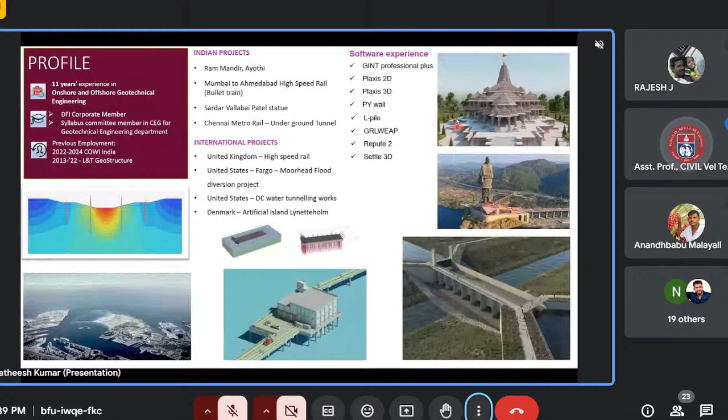Is it visible now? Still your profile page is visible. Okay, maybe some internet issue. Satheesh, you have to share your entire screen, not just the window. I am selecting the entire screen only. I think if you close this PPT, the other one will come. Is it visible now? Your profile only is still visible. Okay, let me reconnect. Sorry for the inconvenience.

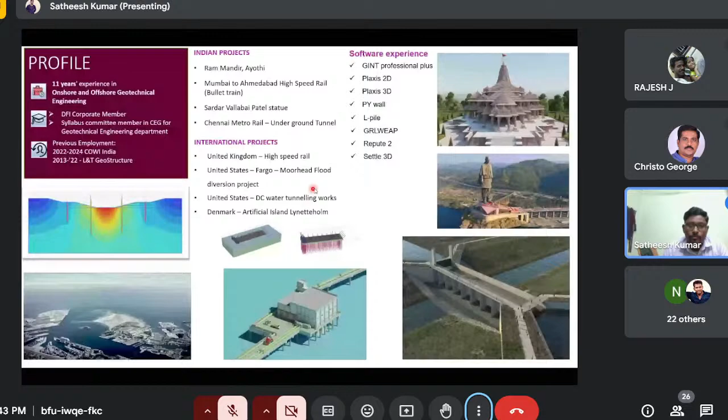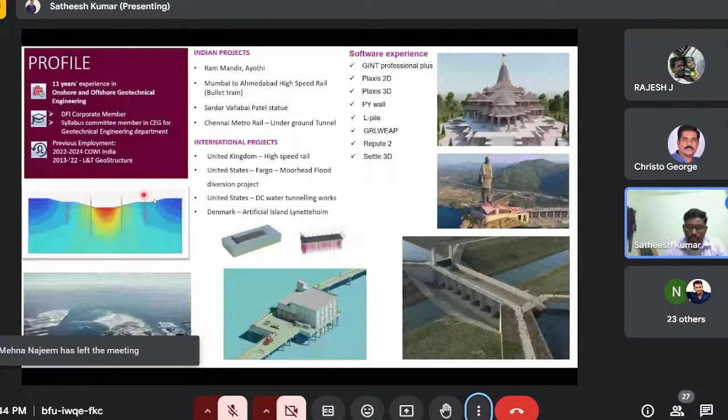Is this geotechnical and foundation engineering slide visible? Yes, your content slide is visible. Okay, thank you. This is the content I'm going to cover today: introduction to foundation, geotechnical investigation, field load test, deep foundation, and ground improvement. These are the major topics we need to refer to for these things.

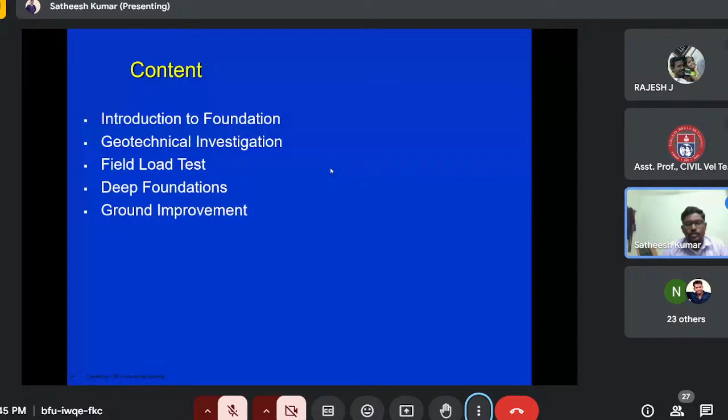Then I'll go through typical work in geotechnical investigation, which is mainly carried out towards the responsibility of ensuring sites are adequate, safe, and economic for design. When it comes to investigation, about 1 to 2% of the total cost is spent on geotechnical investigation, which actually governs the huge amount of work for the superstructure.

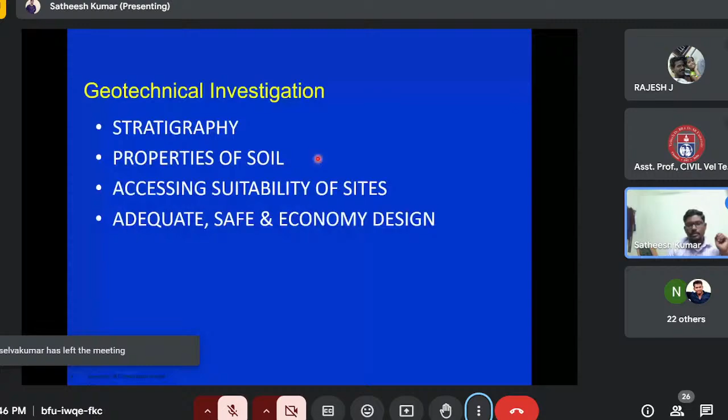Mainly, the soil data required for any geotechnical design relates to soil group classification. When it comes to strength and compressibility characteristics, which define bearing capacity or settlement, this includes angle of internal friction, unit weight, water content, permeability, maximum dry density, optimum moisture content, core recovery RQD, and UCS value. In addition, we need to measure the water table depth.

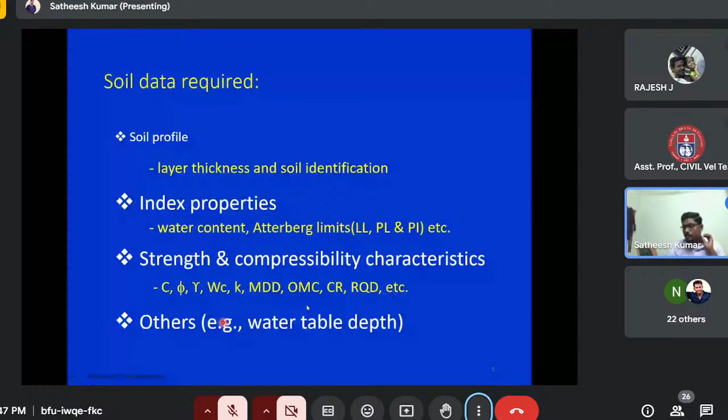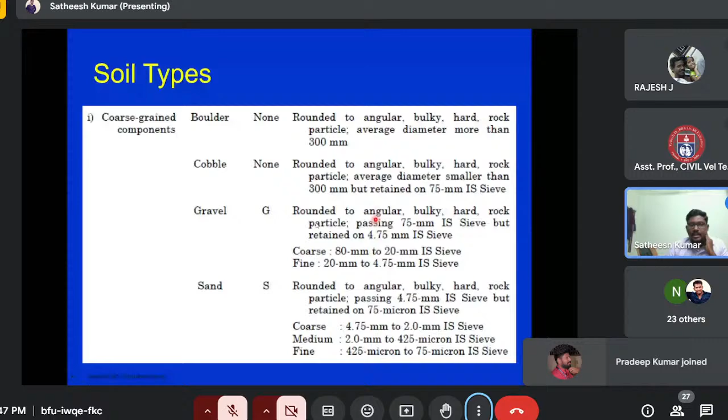This classification is given in IS 1498, based on grain size analysis. You can categorize coarse grain components more than 4.75mm as gravel, more than 75mm as cobble, and more than 300mm as boulder. The finer components are silt, clay, and organic matter - I would call these problematic soils. Silt and clay become the major issue for foundation design, especially under the water table.

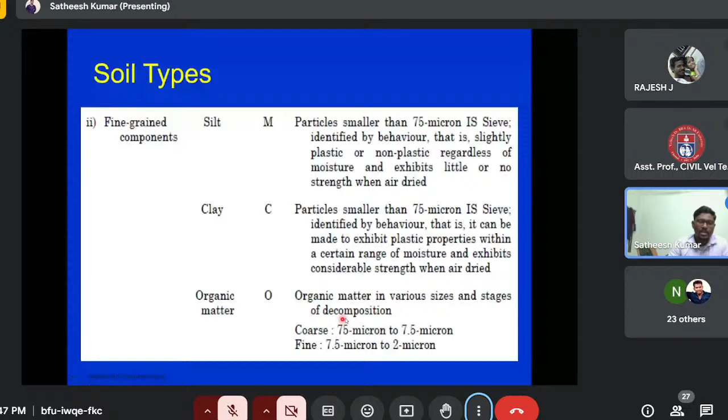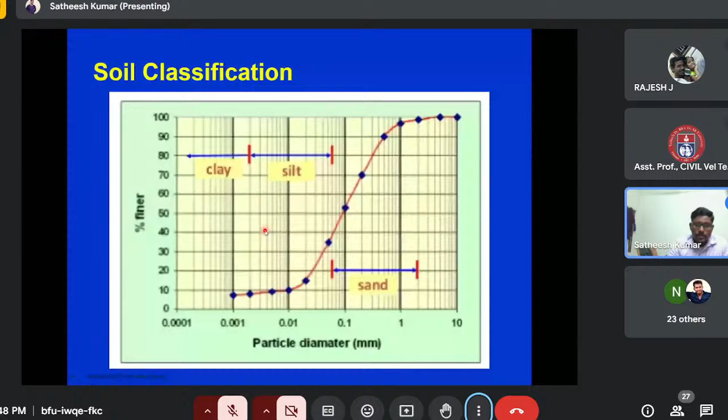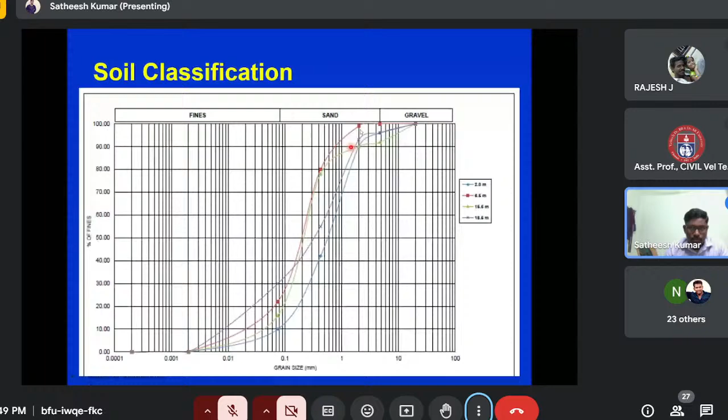Reliability on the parameters, we need to pay more attention to that. There are so many authors who have studied about this standard penetration test, and they are preferring to go with the standard penetration test. This other test, I would say in our Indian projects, hardly we'll be going with once in 10 of the test results, but in Indian projects actually it is mostly borehole investigation.

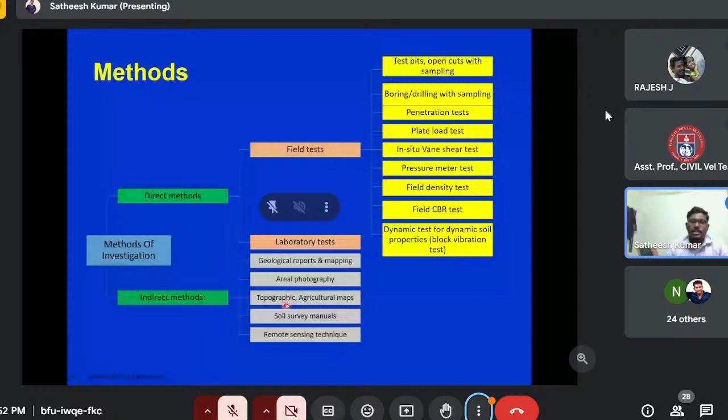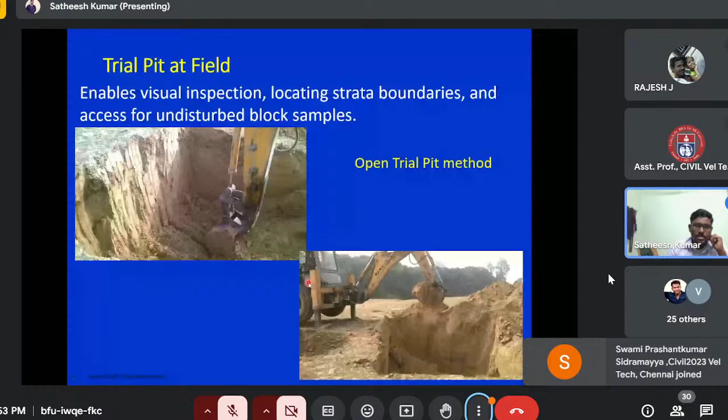Previous authors might have covered this explanation about this SPT test.

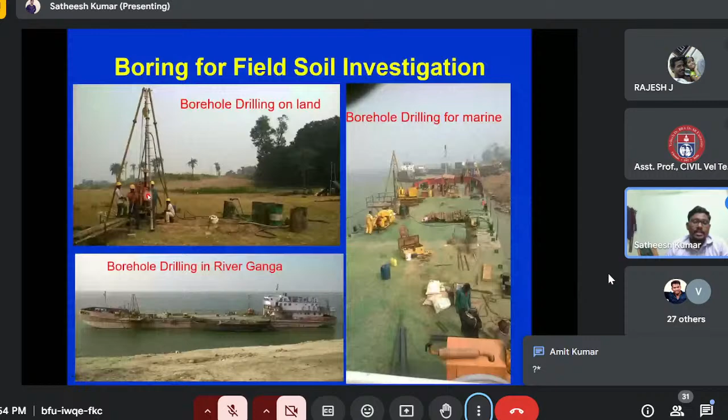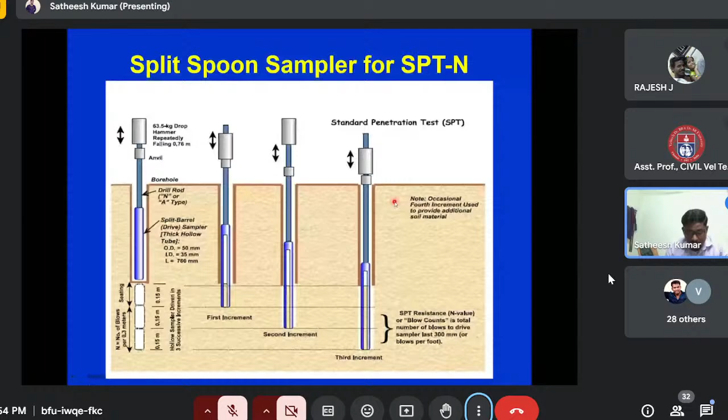One thing I would like to emphasize is the correction for that SPT test. There are other manuals and references where the tendency is we need to perform this rod length and hammer efficiency correction, and this sample diameter, bore diameter correction.

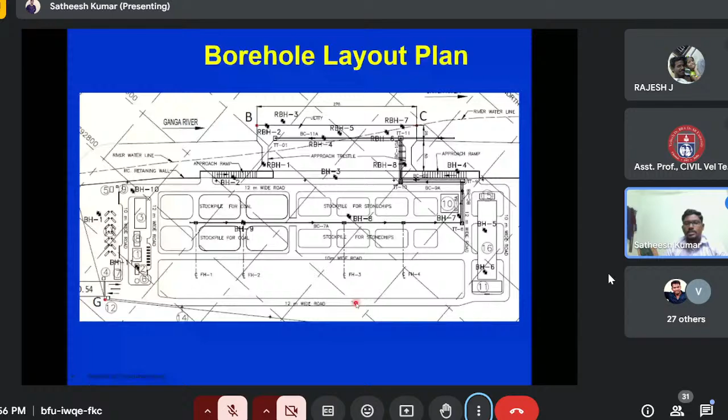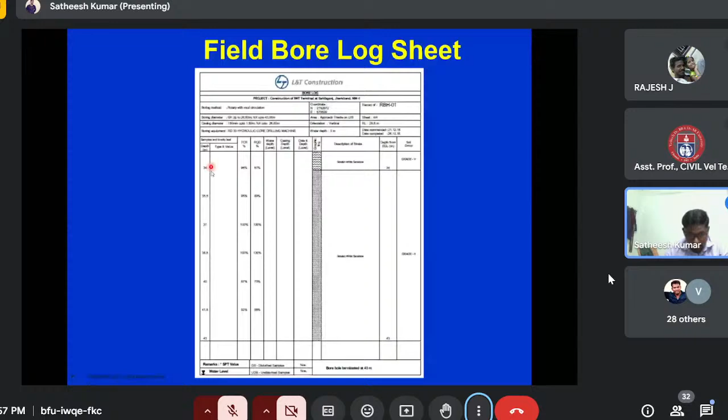So this is a typical bore log, and this is a typical subsoil profile which is generated using the soil investigation data arrived at in the field and the lab. This profile is made with the help of gINT software.

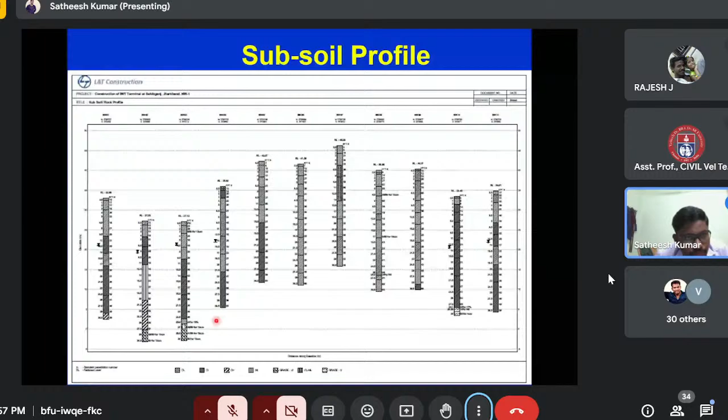It will be helpful to arrive at the rock starting level, because in this project we need to terminate our pile on the rock. So you see this hatch pattern grade 5 rock at the pile foundations. The pile foundation

are actually mainly recommended when the superstructure load is more, and then you need to take care of the bearing capacity which is offered by the soil.

And when it comes to riverfront structures, again, this pile foundation is mostly recommendable because construction of open foundation or raft foundation in the waterfront is difficult, so we go with the pile foundation.

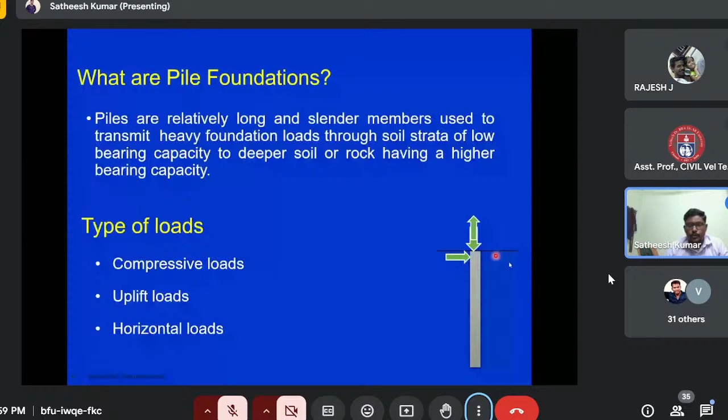So mainly for the piles, it is compressive loads, uplift loads, and horizontal loads acting on the building or superstructure. Then there's lateral load or the eccentricity of that lateral load, and uplift load - those are the major locations wherein you can find uplift loads.

And we have revised the type of pile. We have used both the cast-in-situ pile, driven cast-in-situ pile, and in some locations near this Manadi and all, we went with this precast driven pile for supporting structures - not for the main bridge structure, but for office buildings, for which we went ahead with that precast pile foundation system.

The main pile load transfer mechanisms are end bearing and friction piles. So when you are placing your foundation in sandy strata, the main resistance of the pile would be generated through friction. When the load is in compression, because of the interfacial friction between the pile and soil material, there is resistance - that is your friction resistance. This is how friction force is developed when compression load acts.

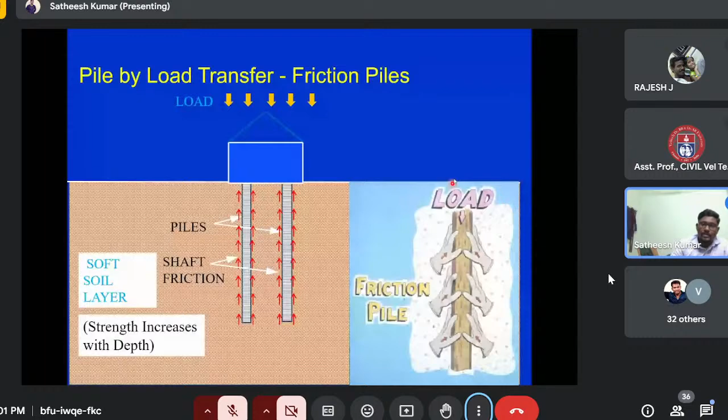When it comes to end bearing, let's say if I have a soft soil of SPT-N value less than 4 for a depth of say 12 or 13 meters, I cannot embed my pile into that soft soil, so I need to search for a stratum which is rigid. In such cases, the resistance would mainly be developed by the rock. Whatever load is applied will be directly transferred to this hard strata, since the soft soil is not going to offer any resistance because of its low stiffness.

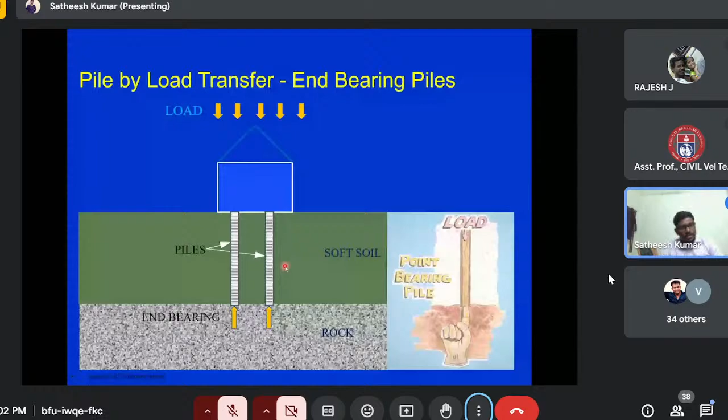To estimate this bearing capacity, I would mainly recommend IS 2911. For any Indian project, most cases follow IS 2911, wherein pile capacities are explained by the static formula method and dynamic formula method. It has two components: one is your frictional resistance and the other is bearing resistance.

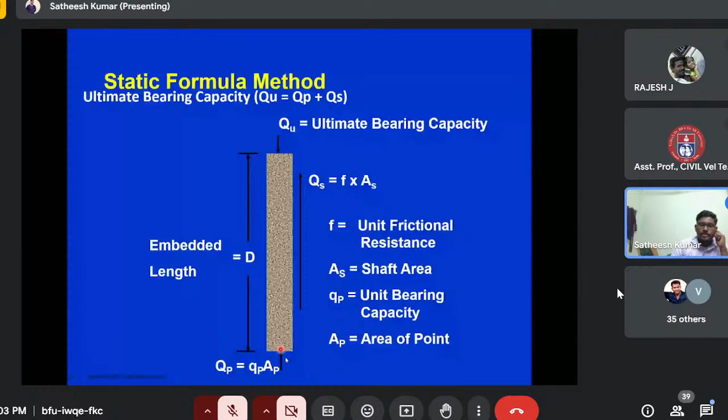Frictional resistance is based on the peripheral surface area of the pile. When it comes to bearing resistance, it is based on the cross-sectional area of the pile - that portion which is contacting the bearing strata. That area is taken and the unit bearing resistance multiplied by cross-sectional area gives bearing resistance. For uplift, we take only the friction resistance developing in the pile because the pile is being lifted in the upward direction.

If there is a loss of contact with the bearing strata, we need to consider only the resistance developed on the side of the pile. That is your safe skin friction capacity, applying the reduction factor or safe capacity factor given in IS 2911.

Usually, with history or test results available, you can go ahead with a factor of safety of 2.5.

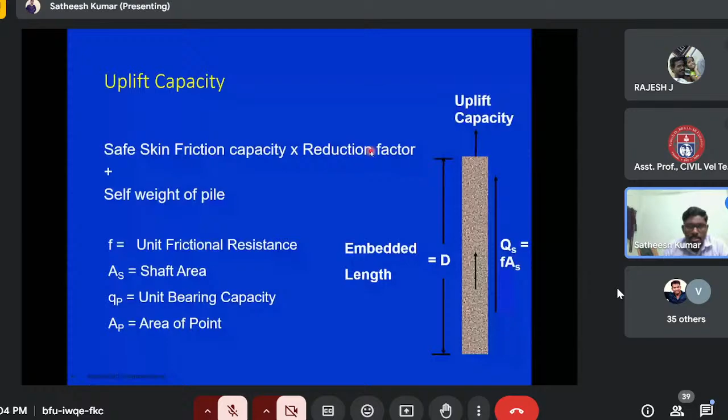When it comes to lateral capacity, I already said it's a major factor of concern for waterfront or marine front structures. The major lateral forces are wave and current force, and also wind force acting on the exposed portion.

This involves free head condition and fixed head condition, whatever approach is used. Most of the time, for marine structures or waterfront structures, more than vertical capacity, this lateral capacity requires the suitable depth of fixity to generate long pile behavior.

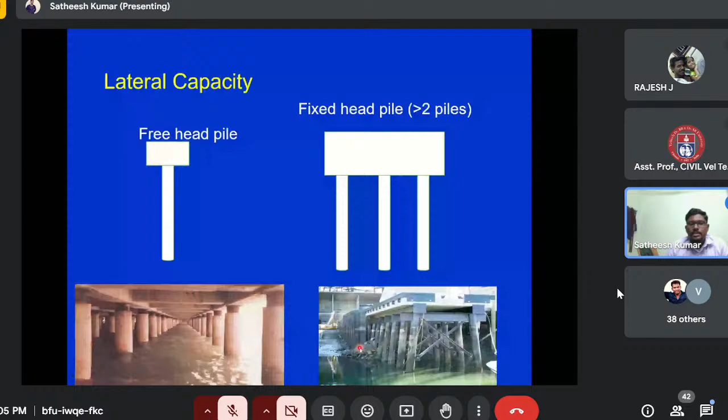So in such cases, mainly this lateral load is going to be the governing one when it comes to waterfront structures.

How that design is being done depends on different soil information available at that particular location. We are not performing continuous drilling all along the pile area, but for which we will be recommending termination criteria.

If it is continuous soil, then we'll be giving fixed length. If it is varying strata, then minimum embedment applies - the socketing length given in IS 14593 should be maintained in the weathered rock.

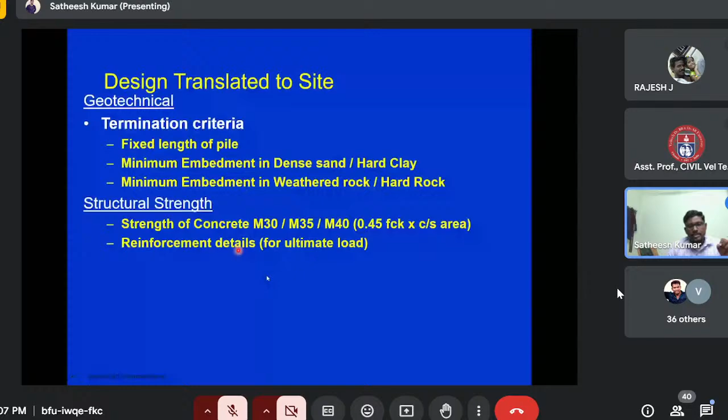Then the reinforcement details, which are designed for the ultimate load. When it comes to load, we need to verify based on the load combination - there's the initial test load and the design load.

This initial pile load test is conducted on a sacrifice pile which is cast only for testing purposes. The routine load test means the test is conducted on the working pile which is constructed for the actual live condition.

Then again, pile dynamic test and pile integrity test. This pile dynamic test method is not a regular test like the initial load test - it is one of the dynamic methods used to replace the static load test.

For example, we have the Kentledge and reaction pile method. If there is any space constraint or some other instance, then you can go ahead with this pile dynamic test, which needs no waiting for pile construction.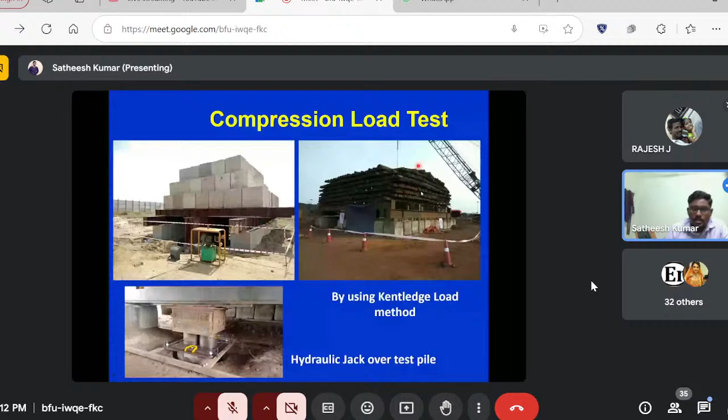This load was 4,000 tons, so this was the Kentledge method for 4,000 tons. We were not having suitable space, so we went ahead with this method - both concrete blocks and steel were used as Kentledge weight in one of the projects.

This arrests the load which is coming from the upward direction of the jack. Nearby piles are considered as resistance for this uplift force from the jack - this is called the reaction pile method.

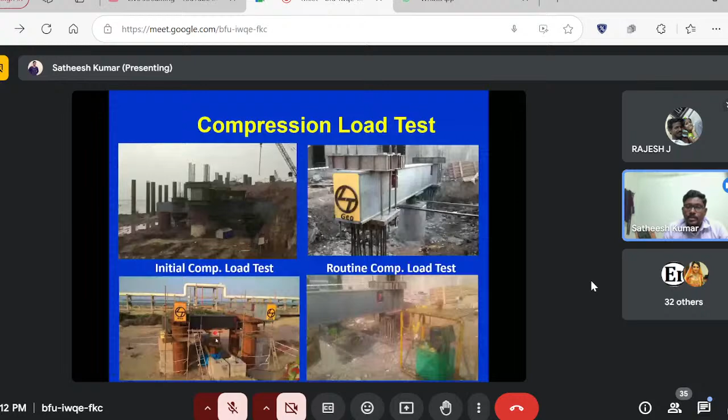This was the setup I was explaining - here the concrete blocks are placed on the ground because the load is actually 100 tons or 200 tons. The bearing capacity at this location was around 5 tons per meter square, and the load coming on the block is less than 5 tons per meter square, so we proceeded with this.

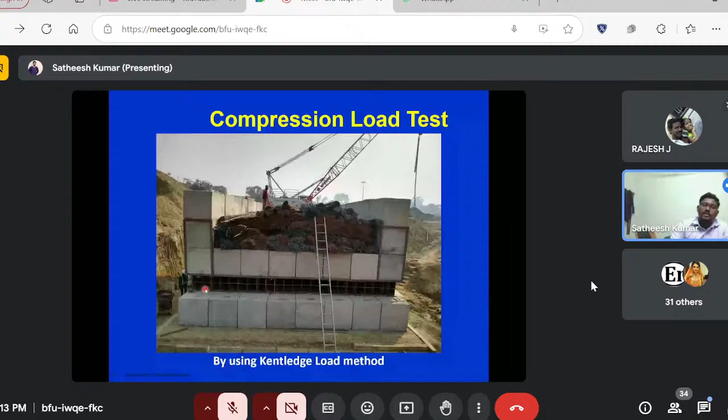For a concrete load of 1,000 tons, we are unable to place the concrete blocks directly on the ground. So beams are placed over reinforcement, and this setup is made.

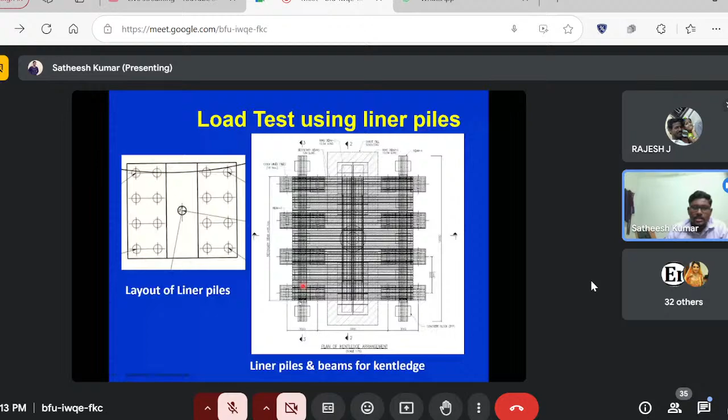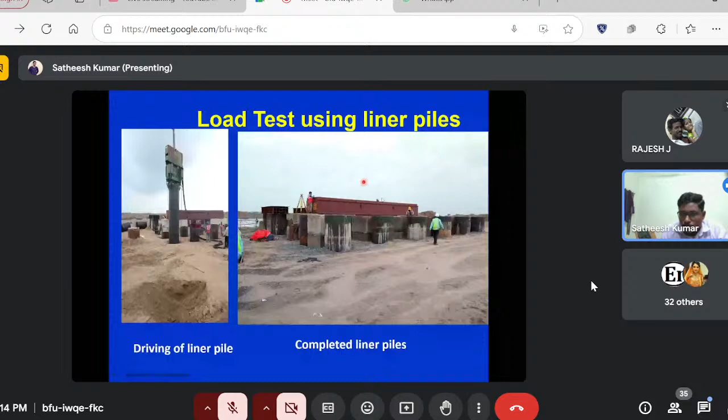The test pile is under this beam, and these are all like temporary support piles. If I place this concrete, to support that, again a separate temporary foundation system is made with the help of liners - this is actually a hectic job while executing.

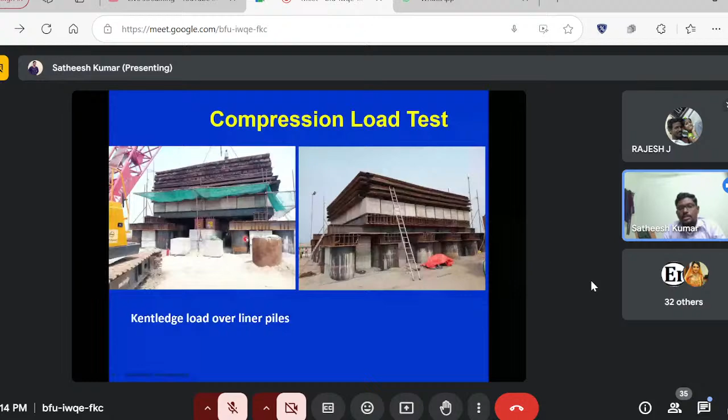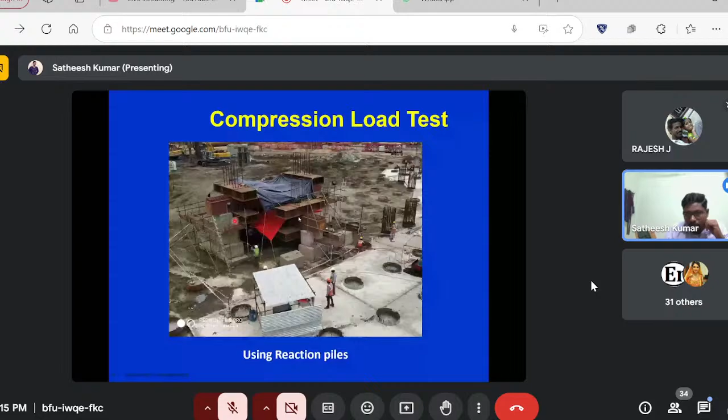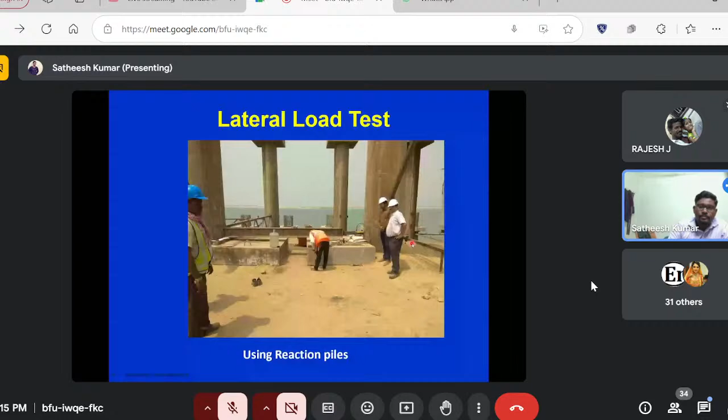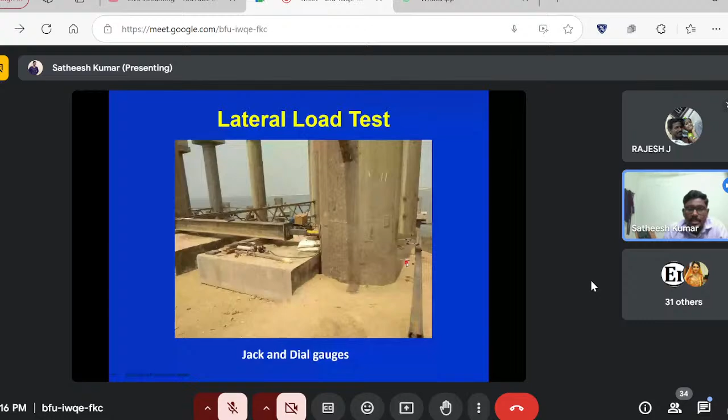Another view shows dial gauges are fixed, and that movement is being monitored. This is another method of pile load test, the anchor method - instead of reaction piles, anchor systems are used to resist the load coming from the jack.

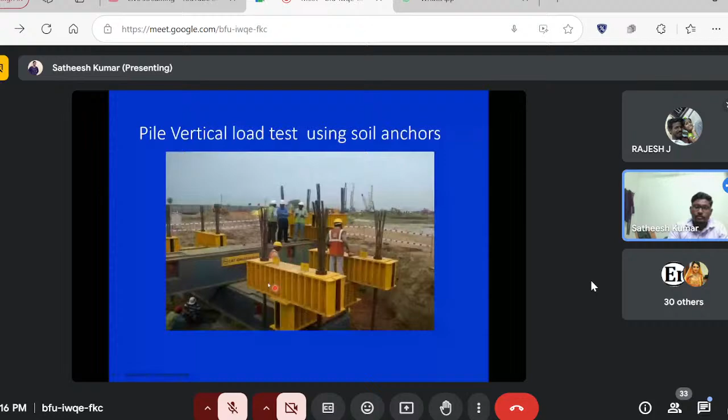Firstly, we saw that compression test and lateral test. Now it comes to the pull-out test.

In this pull-out test, uplift loads will not be there in all piles, but in marine areas, when there is berthing or mooring action, there would be compression load in the front area piles and tension load at the rear area piles. So for that pile, we need to perform the tension capacity test.

For this tension load test, anchors are actually not preferable. We should go with the reaction pile method.

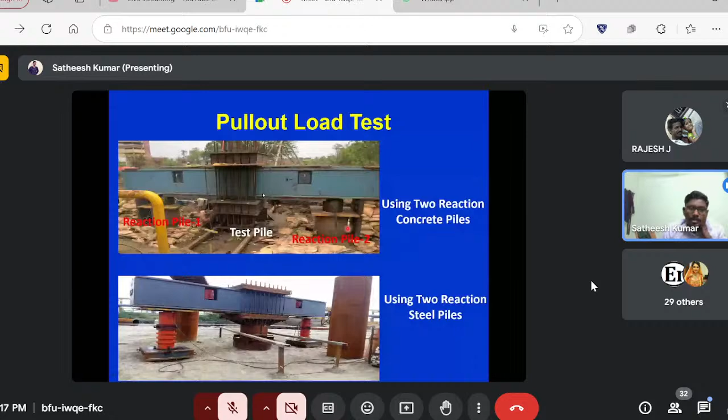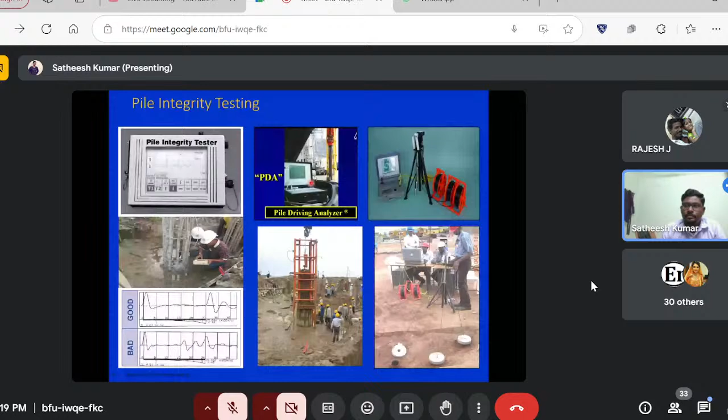Let me stop here. Am I audible?

Just a doubt - I don't know whether it's my network or what. Your voice and video are getting broken. Is it an issue only with me, or is another participant facing it? No, it's the same for everyone. Maybe some bandwidth issue. Can you correct it? Is it clear now? I think it's fine now, perfect.

Let me know, related to soil investigation or piling, if you guys have any doubt, you can ask and we can discuss. It may not be in line with the presentation I made, but in general, if there are any doubts related to soil investigation, pile foundation, or shallow foundation, you can raise them and I will try to answer.

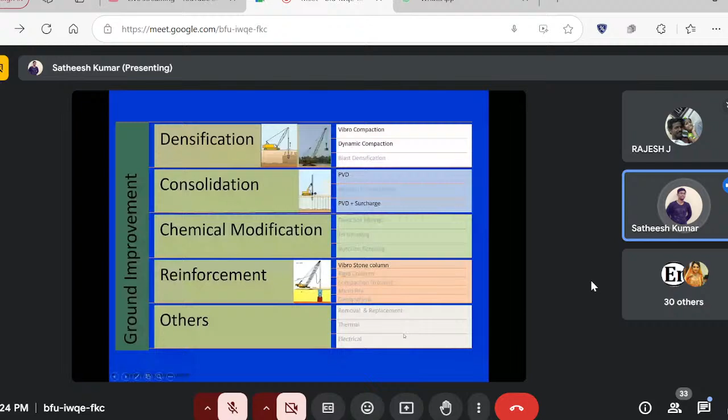Then this chemical modification techniques, then reinforcement using vibro stone column.

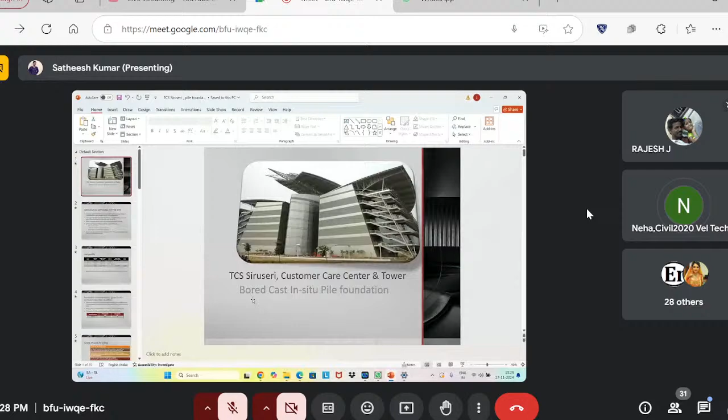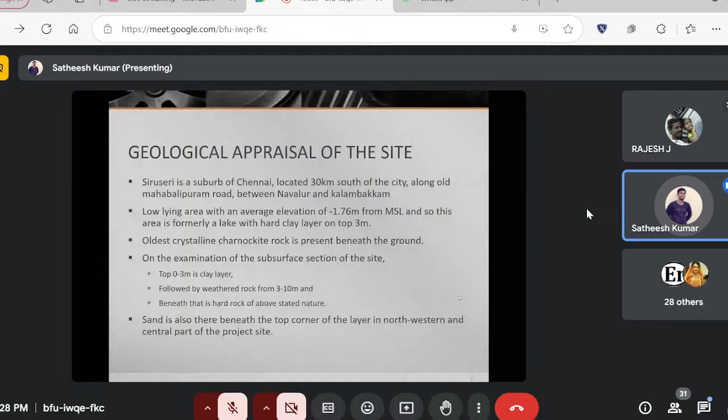So firstly, we conducted a series of geotechnical investigations to identify the subsoil condition of that particular location, wherein we identified that the top 3 meters is a clay layer, followed by weathered rock from 3 to 10 meter depth, then beneath that hard rock was encountered. This was the stratigraphy of that particular location - silty clay, then sand, and then rock from 10 meter to 25 meter depth.

For that silty clay layer, SPT N value was observed as 3 to 15, and in the sand layer it varied from 22 to 100. In case of rock, core recovery range values were in the range of 53 to 100, and RQD was 0 to 100.

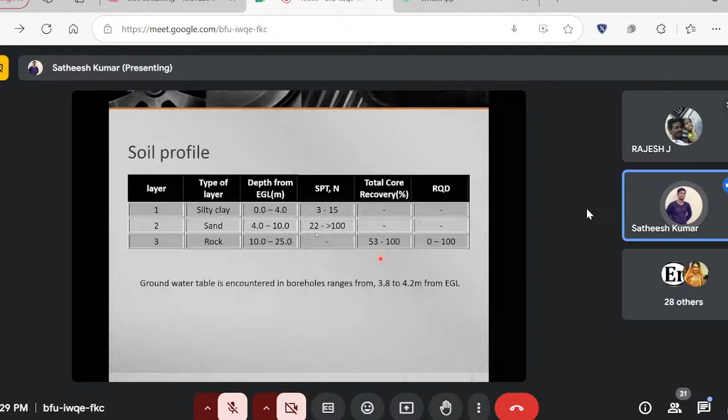So the foundation type which we recommended for this particular case is a bored cast-in-situ pile of 600 mm diameter, with a length terminated in the rock. Vertical capacity of the pile is 1500 kilonewton and lateral capacity is 75 kilonewton.

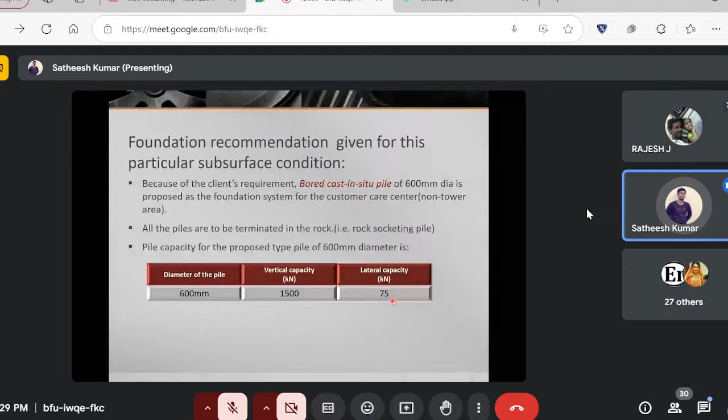26 piles were completed within a day.

This is the sequence of the bored pile construction. Firstly, the pile position will be fixed with the help of the surveyor based on the coordinates given in the drawing, and the center point of the pile will be fixed. Then around that area, preparation for placing the reinforcement and concreting will be done.

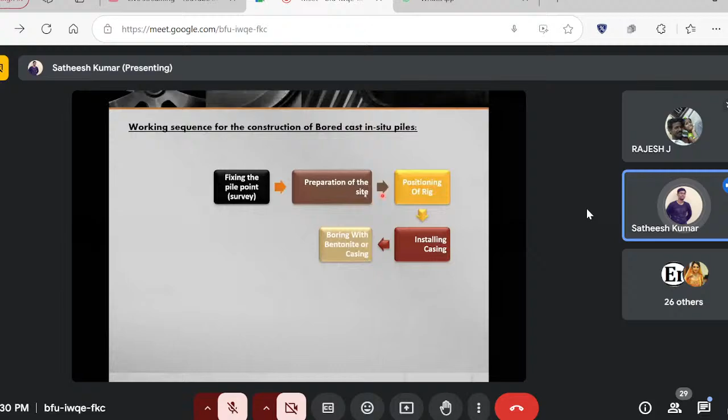This is required to place the positioning of the piling rig. That bored cast in situ machine needs to be placed near this particular point for boring. Firstly we need to install the casing, then bore with bentonite or casing. If it is with a temporary guide, it can directly proceed for drilling.

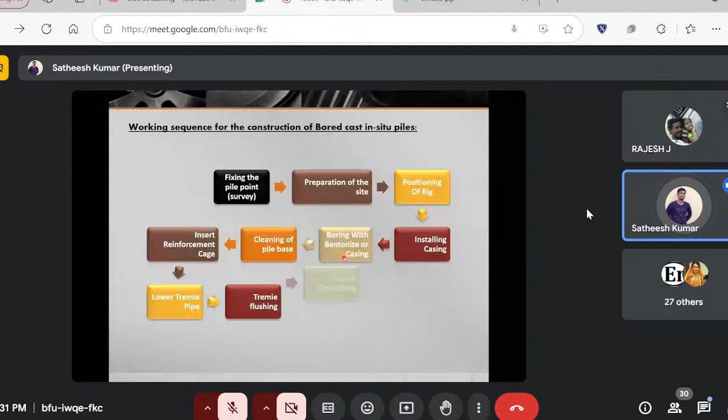After reaching the required depth, the base of the pile is cleaned. Then we need to lower the reinforcement cage, followed by the tremie pipe. With that tremie, the bentonite slurry inside the borehole is displaced by concrete. Then whatever concrete is excess at the top needs to be chipped off. This is the step-by-step procedure of the bored cast in situ pile installation.

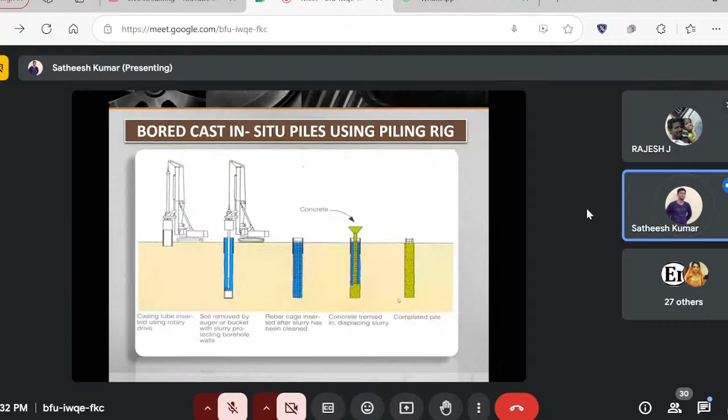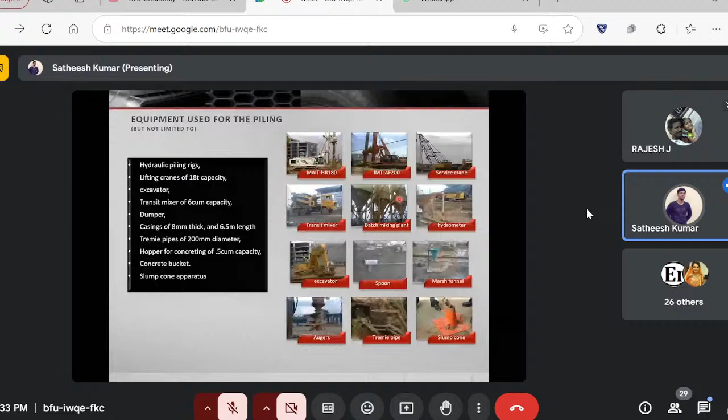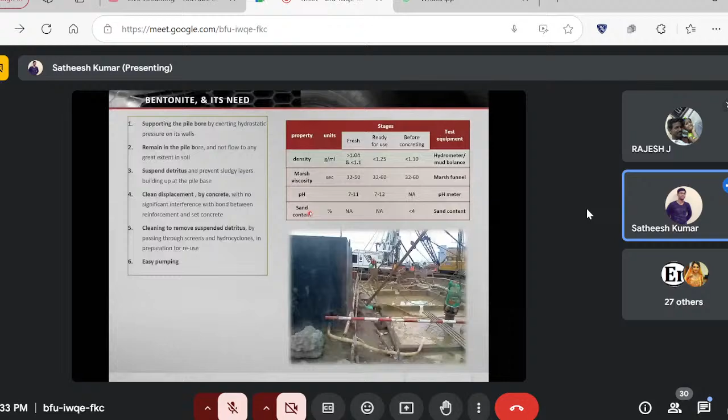The material placed in the pile, the property of the bentonite needs to be checked at frequent intervals so there should not be any borehole collapse. The sand content of the bentonite also needs to be checked at frequent intervals. This is the bentonite tank arrangement.

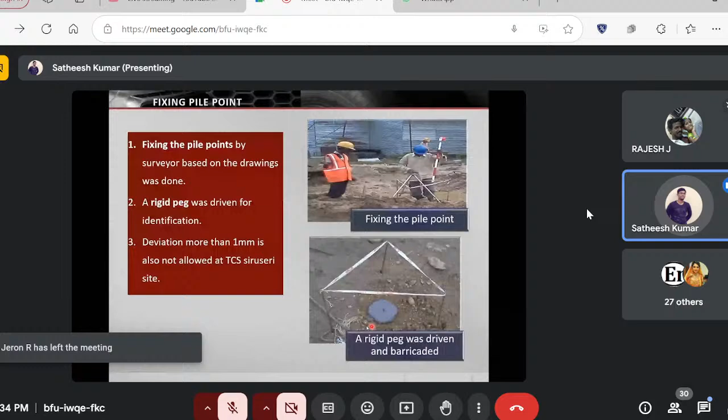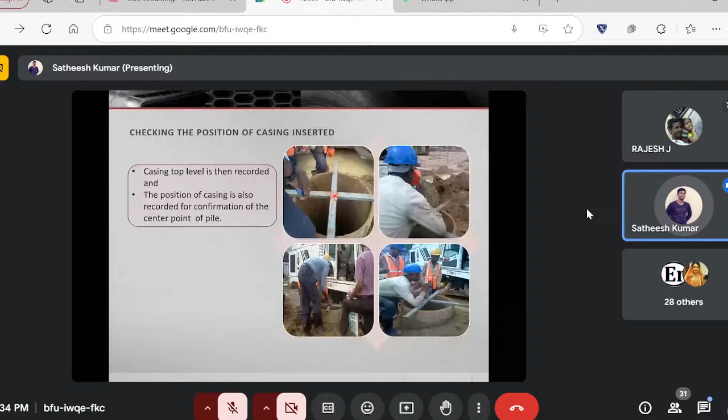So then we need to make the boring with the help of a piling rig. This is checking the center of the boring location. After the casing is placed, we need to check the orientation of the casing, whether it is at the exact location or if there is any tilt or misalignment. Then the boring action needs to be done with the help of a boring machine inside the casing.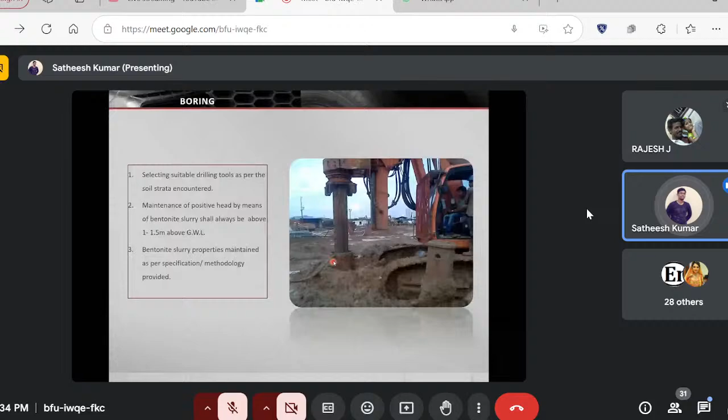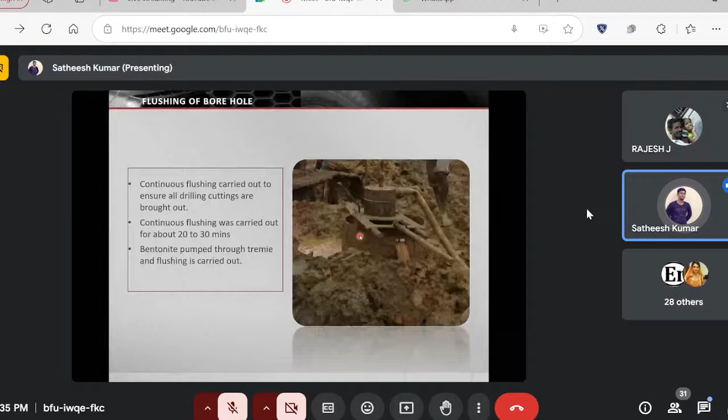This is the flushing of the borehole. Once it is connected, if left for a period more than 30 minutes, a filter cake can form, so continuous flushing is needed.

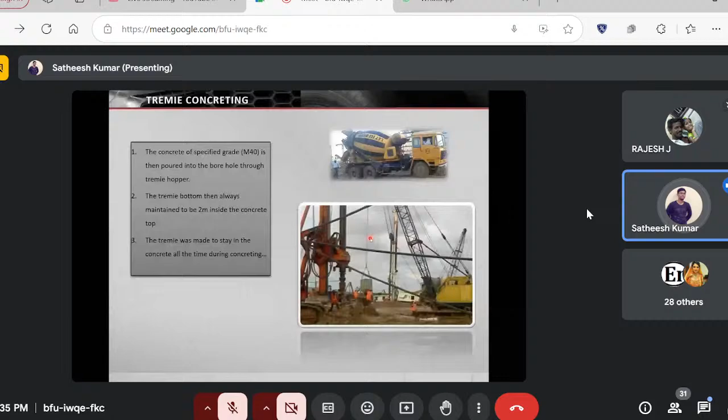This reinforcement cage is lowered with the help of this crane. This is where the concreting is carried out. These were the rigs used at that project.

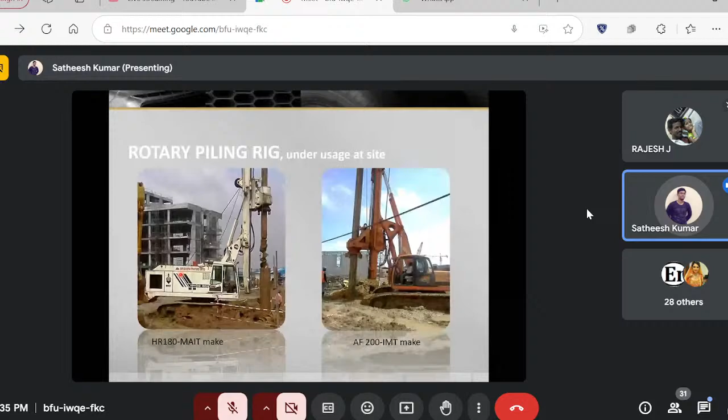Any questions? Sir, your voice is not clear, I'm not receiving your voice, please.

Any questions? Am I audible? Yes sir, right now it's audible, sir.